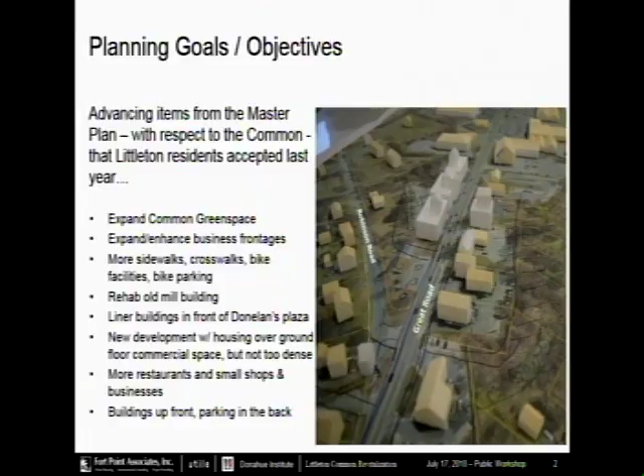So our goal for the revitalization project - is everybody here familiar with this part of the project for Littleton Common? Okay, so I'll skip ahead. Basically we're trying to find a way to implement the vision that came forward in the master planning process for the Common, as illustrated here. Some of the particularities that came forward are things we're working on right now with the planning project, and then advancing them through in a zoning concept.

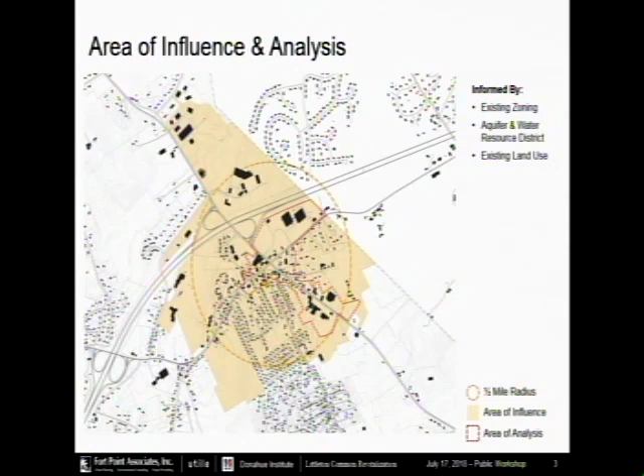So, status of this project, to give you a sense of where we're at - we're essentially in the middle of the project. We did a lot of work in the beginning, which I'll briefly overview, to get things kicked off and moving forward. We're at a process now where we have some decisions to make about how to advance the plan we're developing within a proper zoning scheme.

So that's why I'm before you tonight. The rest of the project will basically be informed by what happens with our proposal in terms of what type of zoning changes and regulation we will prepare.

Next slide. So as mentioned, we've done a lot of work. We've been coming before the Master Plan Implementation Committee a number of times, working with them directly on this project. And obviously we've now moved into the redevelopment scenarios and market analysis piece, and our task at hand has been additional public engagement.

We had our public workshop on July 17th, which I'm sure a lot of you attended. We want to advance a lot of the feedback - we got some very important and very specific feedback from that process that we want to ensure goes into the plan and the zoning analysis.

I'll be quick here, but I want to give you a bit of an update on the scenarios. The goal here is very important for this project because for us to determine what zoning changes, what regulatory changes need to be made, we need to nail down what the vision is for the Common. So that's essentially the goal of why we prepared various scenarios.

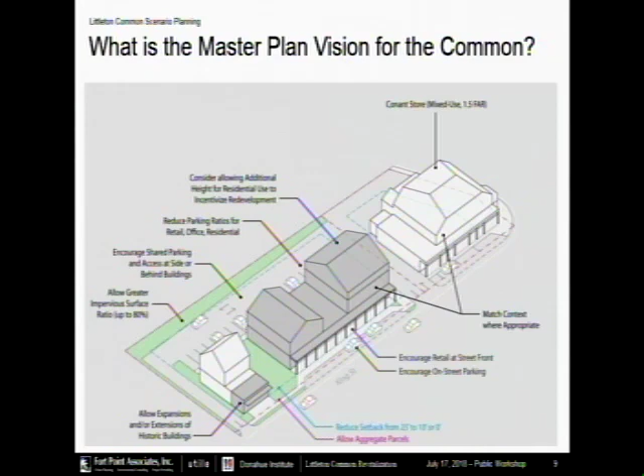You're going to see this visual a couple of times. It's a good illustration of what we saw as the vision initially for the Common, and we refer to this to ensure our planning team is on the right track. We took a couple of parcels immediately adjacent to the Common as example parcels to see what some of the initial desires of the town would look like. This is not to say that can be done right now, but keep this as a scale in your mind of the types of redevelopment we heard from the town.

I thought it would be important for you to understand how we did this, because it's important to know you can't necessarily do a scenario for 60 to 80 parcels. We wanted to find what we call the soft sites, the most representative parcels, or the most challenging parcels, so we could really understand what the opportunities and challenges are. You'll see that in the next slide.

So how do we test that? We tried to figure out what's the current density, where are the historic buildings, what are the age and type of your building stock and housing stock, and whether there are any lots that are underutilized, et cetera.

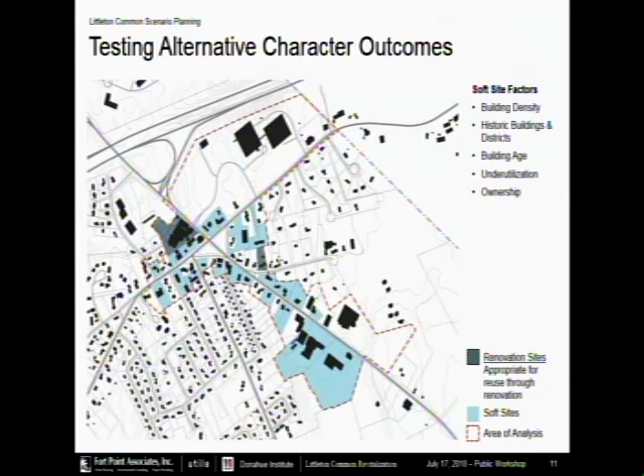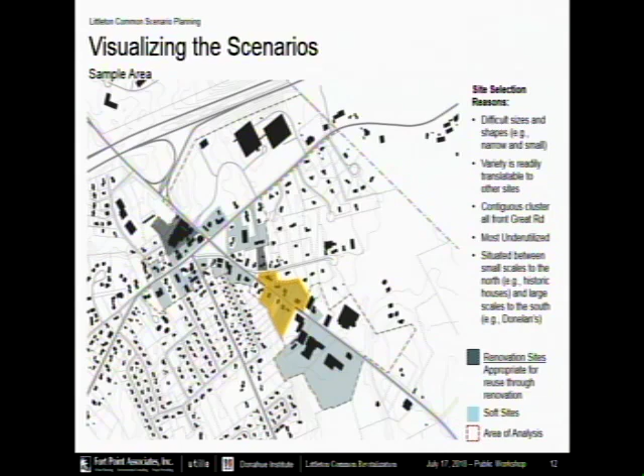Once we had a good understanding there, we could narrow it down to the next slide, which was: okay, what parcels should we take and create these test fits? That is to say, you test the type of density, dimensions, et cetera, changes that we think the town wants to see, and see what that would look like. That's essentially what we did with the scenarios.

The first one, just to give you an idea, the sample area was a representation of a lot of different types of parcels—challenging parcels, some lots that were very skinny, some larger, some only utilized in one spot in terms of structures. So we have a good variation, a good representation, and that's what you'll see in this.

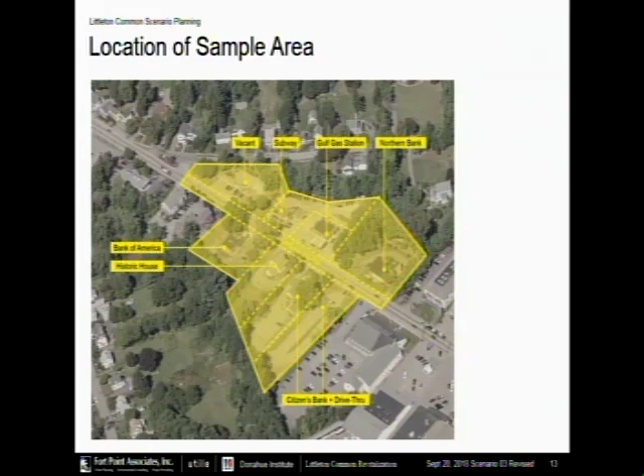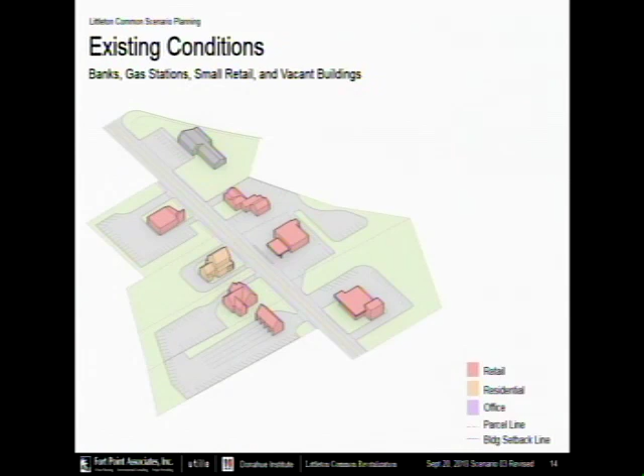Clearly, you have to look at existing conditions, which is what you have and what you are maintaining under your current regulations in terms of uses and size. The next part shows how we went through this—again, this is information from the public workshop, but I wanted to be sure everybody was with me on this.

For us it's to say: a couple of scenarios would be if you maintained the current wastewater scheme without a sewering system—that's scenario one—and what you can do with zoning to make essentially minor redevelopment of the parcels. Scenario two takes that to the next level: if you increased your wastewater capacity, what else could be included on a parcel under your current scheme? So minor tweaks to existing zoning, but different allowances based on infrastructure.

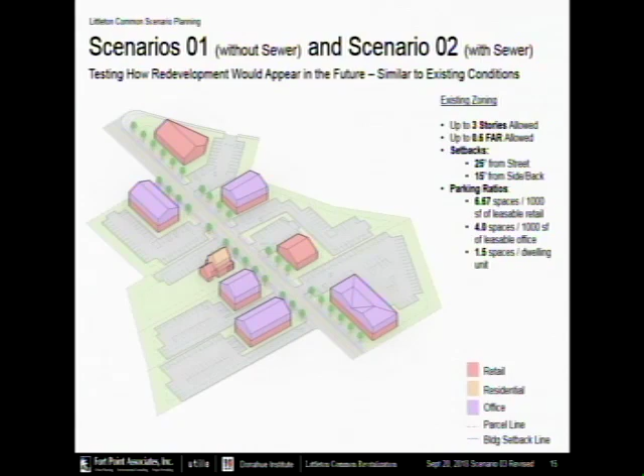The next one is really what people were drawn to—scenario three, don't mind the title, we're calling it side by side, because there's a way you can also have these types of uses stacked up higher, so you'll have greater height. But we understand that's a scenario where the town has some residents and town members with concerns in terms of massing and the height of buildings.

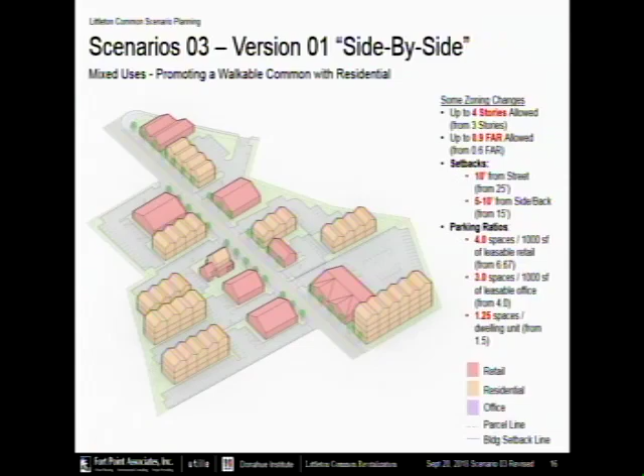So this one is what we think has been sort of the preferred scenario, in terms of density, in terms of height of buildings, in terms of the type of mixed uses. Now, what we didn't realize was that mix of uses was something that needed further analysis, like what type of office and different types of commercial and retail you could have. So we've tweaked that further.

Moving to the next element is where we're at now. This analysis we've taken from the public workshop. This is new information, so it needs to be discussed with the implementation committee. But to give you an understanding, now we are including office, and a varied mix of uses, so that we can best analyze what type of zoning and changes would be required.

I want to be clear that this is a scenario, meaning we don't expect the town to say this is exactly how our building scope and scale should look. It's more like using Legos versus a whole series of landscape to determine a model. This is the first step you take to understand the scale of development, and it's where we're basing our information from in terms of moving forward with regulation changes.

That said, we are preparing a revitalization plan that will go broader than that, because things change over time, and we're looking at this from a 10-year, 30-year perspective. What may happen over the next couple of years will be different than the next 10 years and beyond. So the plan itself will be more of a guidance for the town and developers in terms of the other options.

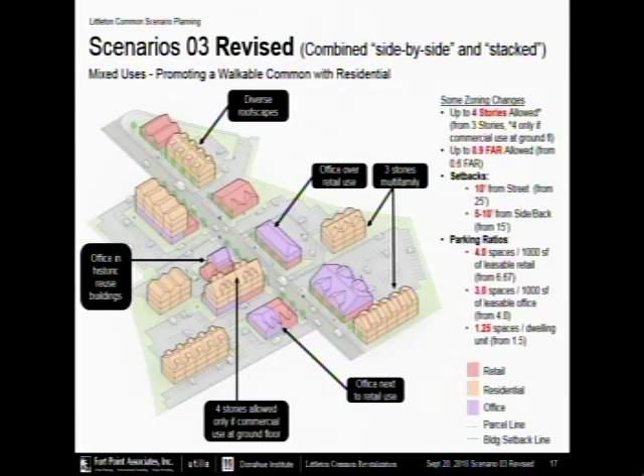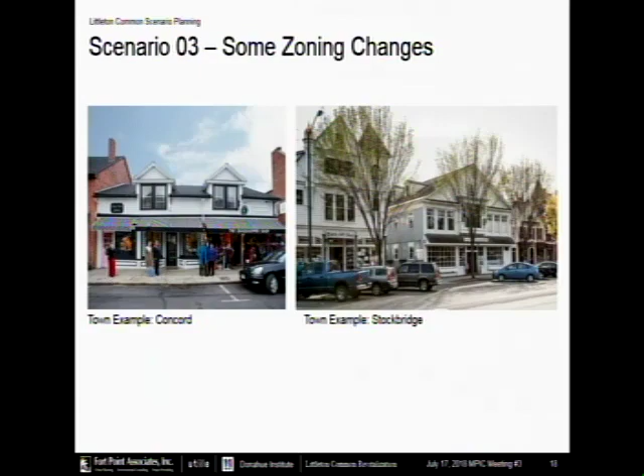So the other option here is looking at scenario 4. These are some visuals showing folks what the scale would look like - examples only. Going to scenario 4 is something the team understands may be a little too dense for the town to accept wholeheartedly. However, it's important to keep this in the back of your mind because nothing's set in stone. We're not abandoning this per se.

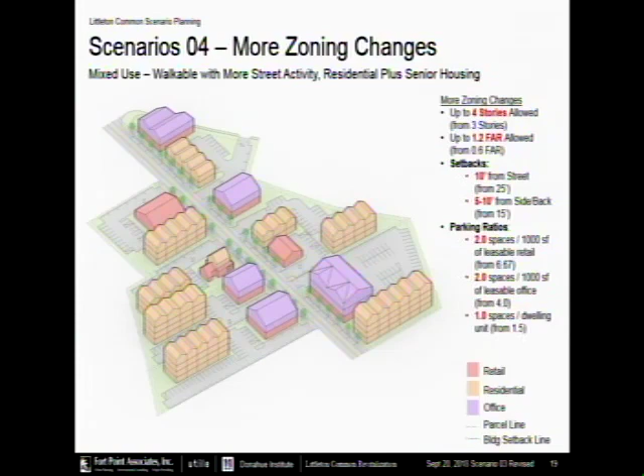The feedback we've received thus far has been more of an interest in maybe not as high of buildings, perhaps a mix of residential within the buildings themselves, with real innovations like decks - a second-story floor with a deck overlooking the retail space in front. A lot of this is also to improve the streetscape and the feel of the sidewalk and the road, trying to make this a walkable, pedestrian-friendly, villagey type of common.

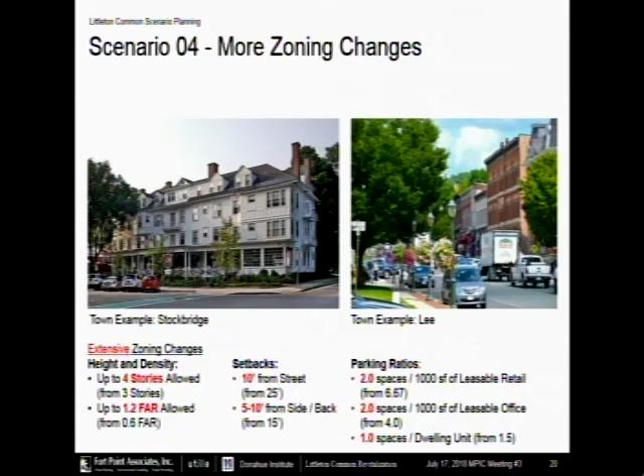Where people are out on the streets and moving in different ways. So the next slide just gives you a scale that's a little different. Again, we're not necessarily basing the zoning off this particular scenario, but just to say that in time there may be an interest in higher height and more density. So moving into the next slide is just giving you a sense of how we move through the scenarios, and what the summary of changes would be.

These zoning changes we are suggesting are basics. They're by no means all the ins and outs and details of design that would need to be required. This is sort of your base - if you want this scale of development for scenario 3 and 4 in the future, these are the types of changes that would need to be made.

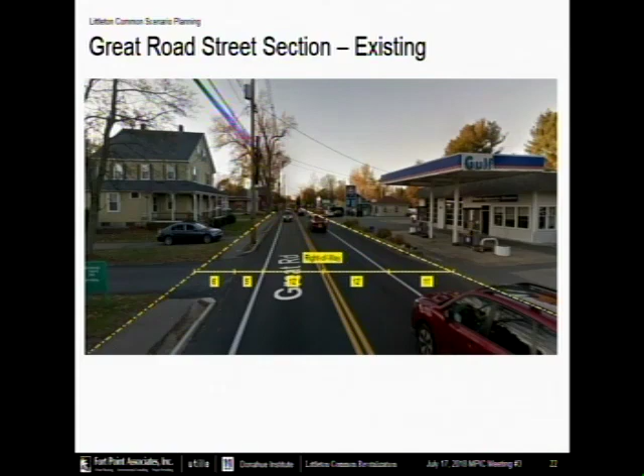So that said, we're at a place now - one thing I did want to mention was that as we do these scenarios, you need to take a real look at the streetscape and what improvements could be made either within rights of way, by the town, and or with working with property owners. The next slide gives you an illustration of what these scales would be. It's very important, particularly in form-based code work, to ensure you're looking at this type of streetscape and landscaping and everything that goes along with having a neighborhood, a connected area.

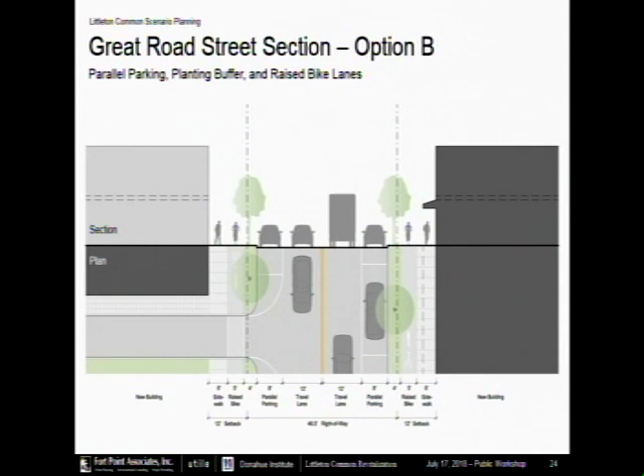So you can go forward through the next slide, it's just a different variation. But the important thing here is, again, we've gone through this process and needed to take a look back - are we on target with what the initial interests from the master planning process were?

And I'd say that we are. This is a direct representation of the general buckets of interests that we've heard. Mixed use scenario is the biggest, Scenario 3 in particular, and how do you achieve that successfully?

That's why the next step is what we're proposing here for form-based code. Before I get into what that would entail, is there a moment to ask if there's any questions about how we've arrived at where we are? Nope. Okay, good. I guess that's a good thing when there aren't questions.

So right now, our project includes looking at the existing zoning code and any particular articles that relate to how you achieve this preferred scenario within the common. That can be done by changing the dimensional uses, by changing even the allowed uses, whether it's by right or special permit. There's ways that can be done.

We understand that there were zoning amendments in, I believe, 2010 to move the zoning code generally into more of a place for smart growth, the state's 40R, whatever they're targeting, that smart growth code, where you can have mixed use, and there is a provision within existing zoning in terms of mixed use, and how the building design should be at least considered.

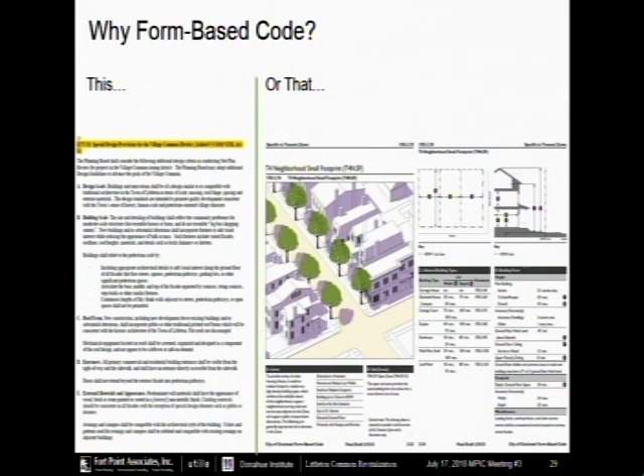I know it may sound sort of elementary, but it's not, because when you try to write something in language without having an example or even a drawing that really shows what exactly you mean by, say, building scale of this type, that's the building scale that you need to illustrate to a proponent, and that's what the code allows you to do.

It doesn't replace your negotiating process in talking with a developer. I mean, obviously, we all as planners would purport having these conversations initially before you have something before you, but it gives a lot more information essentially to the boards in terms of what it is that you're looking for, and then developers can see that.

So the next slide, again, going back to why do we want to use this, and this is again showing you that initial look at these properties.

There's a lot of restriction right now in terms of setback lines and impervious surface coverage that make the form of the development difficult. Even when we did the scenario planning, we started to realize, can we really place a building on this spot, or does it have to be this far from the road or the back?

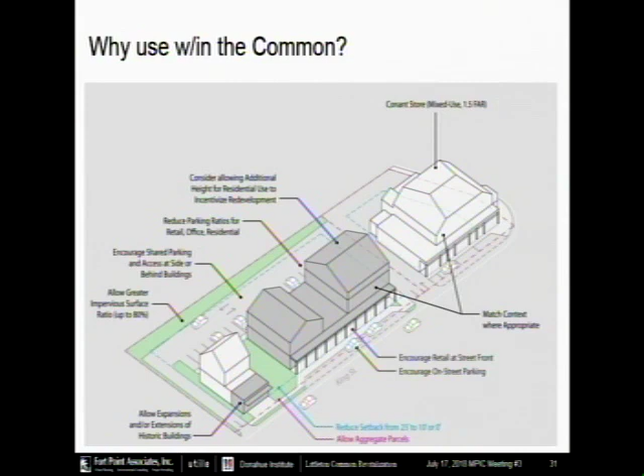So there are lots of limitations. Going to the next slide, again showing what we showed in the beginning, this is the type of thing that can be very easily done using a form-based code, because you are already describing and prescribing these types of flexible

dimensional allowances. I think to really understand what's different is that it's a particular type of article or code that you can either incorporate into your zoning code as part of it, or have it be a standalone ordinance. That's more of an administrative question, how the town wants to handle that.

A form-based code is actually written up as a code, so there's information with respect to purpose and authority and your standard information that needs to be placed in law. The next element is, I think, one of the keys.

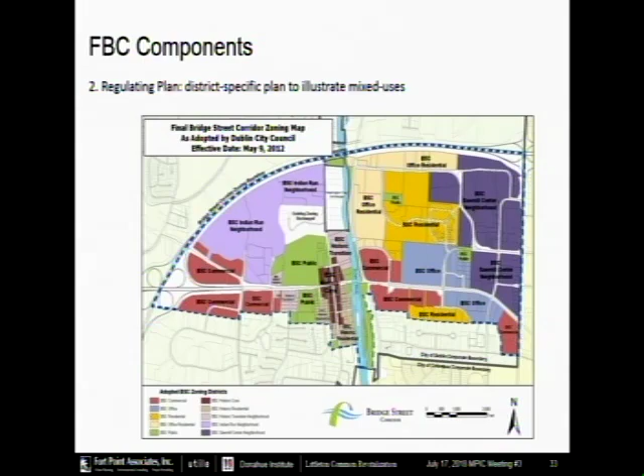This isn't actually one of the better viewings, and I had neglected to tell Maren that I have handouts with some other visuals. The regulating plan, they call it, is really a pretty neat element, because it's where you can take your neighborhood scale and really show the type of uses that you're interested in.

Now this one breaks it up a lot, between a parcel that has office and a parcel that's more residential. That's not what we're suggesting, we're suggesting mixed use. But this is a larger area. If you were to do an even larger district than Littleton Common, there are ways that you can literally map the types of uses that you're interested in.

In the handout, there's an example that's more local, showing how, on a street-by-street basis, you can show green spaces, streetscape improvements, the larger illustration of what you're looking for. A lot of that is work we've already done. When we've gone through and done the scenarios, we've done GIS mapping and spatial analysis, so that's something that's easy to portray.

And the next slide is, actually, can I back up for just a moment? The regulating plan can be done different ways, and one of the ways I've seen is interesting — it's far more of a real zoom into certain street sections or parcels where you want to show something.

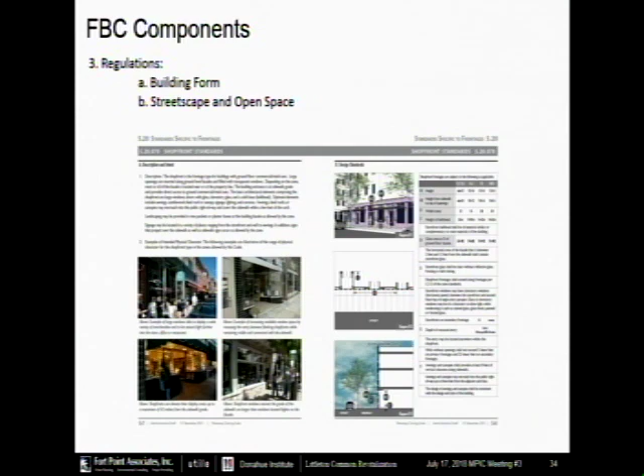It's a guidance document that is brought into law by the code itself, but it's like your other regulations — I'm not sure if you have your own stormwater, for example — but it's providing the developer, the proponent, and the town with guidance as to what you're really looking for: streetscapes, open space, everything that ties together. That's actually what I'm showing here, a section of code, the regulations one puts together for this type of code.

It's very illustrative, there are a lot of examples, there's pictures, it's very informative. And I think that's the real key here. So you get a lot of bang for your buck when you put something like this together.

And that's it, I just wanted to put this before you. I think I would say that all members of our team are very interested in doing this, because we really do feel that it is the best approach for this type of area, for a common that is as unique but also historic and a village type of setting.

But really what it came down to was, when we heard a lot of the interests in terms of how you can ensure community feel, the characteristics of the town, the walkability that folks are interested in, and the greening of the common itself — this is really the way to do it, that you can incorporate all of those elements together.

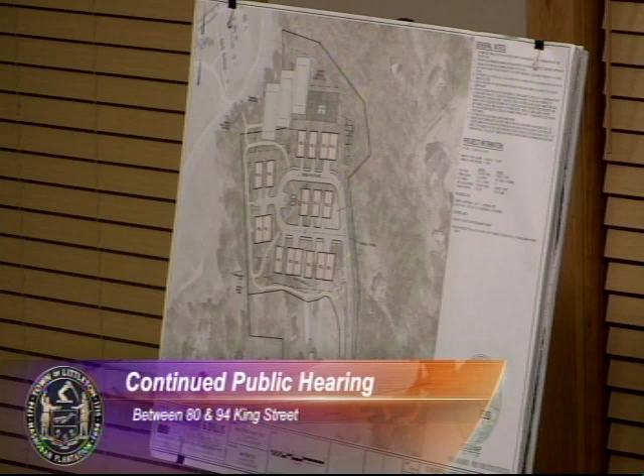We've also included a number of shared driveways, meant to both reduce the amount of driveway and reduce curb cuts, so the sidewalks are less interrupted. In terms of amenities, I think the developer has really gone out of their way to make this a site people would enjoy and use, including the walkways around the property.

We are in preliminary discussions with the town about putting some tennis courts, part on this property and part on the high school property. Those are on the upper left where they're currently proposed, so they could be used both by the high school and residents of the community. Those are the rectangles up in the far left-hand corner.

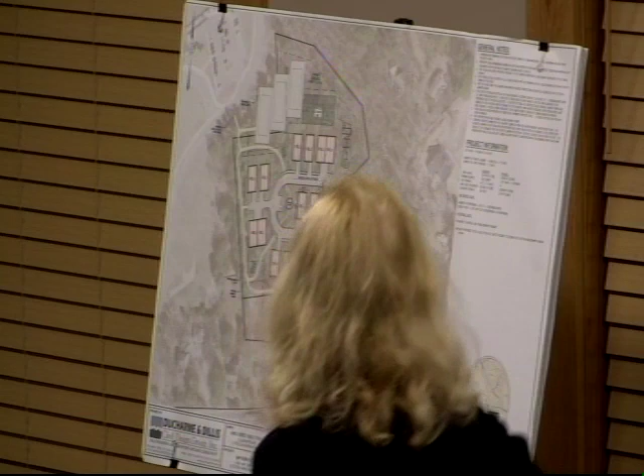We've proposed a common gazebo in the center area, connected by the walk paths, as a center meeting area. We've also proposed a couple areas of community gardens, perhaps with raised beds, tennis courts, and a bocce court or field which could be on the leaching field. It's not part of the open space, but it's an open space type amenity that could provide some activity on site.

One of the design features we're exploring now is trying to make this as eco-friendly as possible. Developers have been looking into either an Energy Star heat pump system or geothermal, trying to find some heating source for all of these units that will help contain cost and make them more affordable for residents.

The circulation pattern is very similar to before. One of the suggestions that was good was to look at a clustering approach, so the units you see on the left side allowed us to take one unit out of the middle and put in more of a centralized gathering place.

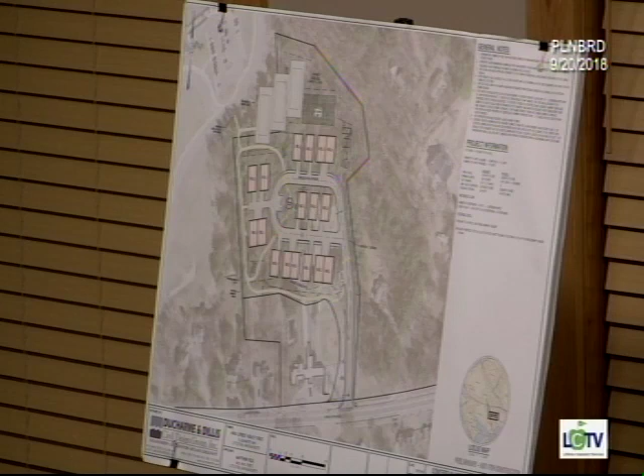So the units are the same as what we proposed to you last week. We just, at the suggestion of a board member or perhaps someone from the audience, looked at a mix of duplexes and singles.

Off the bat, just a safety note - I love the trails you're showing, how it goes up to the high school. It works in my mind. The only thing I'd say is where you're locating it on the road that leads up to the high school - you might want to move it to the inside of that corner along the high point of the tennis court, just for safety to cross at that area. Other than that, in that scenario, it works, and that's all doable.

Yeah, so we'd watch it - certainly some drive my flexibility. My son drives to school, well, he got his permit last Friday, so now he'll be driving my Jeep to school with me in it. Good luck, I know how fast the kids travel that road sometimes, so I would just think if we moved it up a little bit, it would be appropriate.

The other thing, this handout is terrific, just to show us what could be the amenities, so I appreciate you taking the time to actually put that together in color and in detail - raised gardens, the gazebo, the tennis, the bocce. It's a good presentation, so thank you for taking the time to do that.

Sidewalks - I see it goes all the way around the outside. You get the 3 units on the inside. Do they have a sidewalk anywhere they can access to get to? Even if you put something in front of the 3 of them and then a crosswalk over to the larger sidewalk? We could look at that.

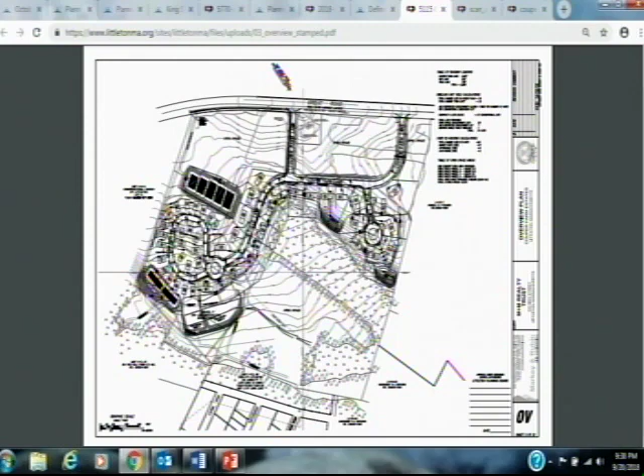So Dean Lane is that loop road there. Basically the lot line is somewhere here? Yes, it's over to your left, right there. And then up to here? Yes, and it goes right around. It's roughly a 5.5 acre site, the whole thing.

I'll show you which units we have on this one. So we have units 16, 14, 13 built, and 11, they're all ready. But it's a single drive loop, so it should be released as a whole lot.

Given all of the new information that they've sent, I don't have any concerns. If anybody else is interested in that information, of course, I printed it all out.

At this point, I'd make a motion to release the lot. I would not have any problem with that. I'm hesitant to recommend it, but you can still come look at the unit. We would love to have you come out tomorrow. How about if we release it subject to, maybe not tomorrow but next week...

...the town engineer saying he has no problem with it? I get the answer to the only question I had a concern about, so now I'm willing, I don't have any issue. What was the answer? That they're going to release the farmhouse to the town at a future date. So I'm good.